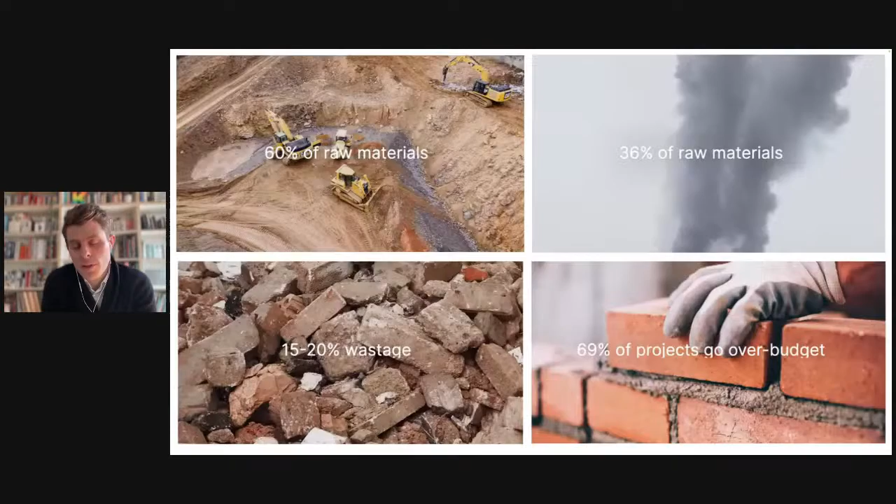It's the single biggest consumer of raw materials. It's the single producer of waste, huge amounts of waste. Projects consistently go over budget, etc., etc. The list could go on, and we're all really familiar with those. And broadly speaking, we know what the future of construction is going to look like, so I'm not going to talk too much about that here.

I think there's a growing sense of consensus around what types of construction, how we should be building in the future. And of course, that's the context in which WikiHouse sits - trying to take those new forms of construction, so zero carbon, manufactured, and put them into the hands of everybody. So doing it in a way that's open and distributed, and can be used by any business, community, anywhere really.

Most of the work that we've done, that you see there in the WikiHouse project, is through the hardware, through the development of the Skylark building system, the blocks - this Lego-like building system, where the goal is really to make it as simple as we possibly can. So we're trying to make building in this way so simple that we effectively take off the table even the idea that it's difficult to build zero carbon homes.

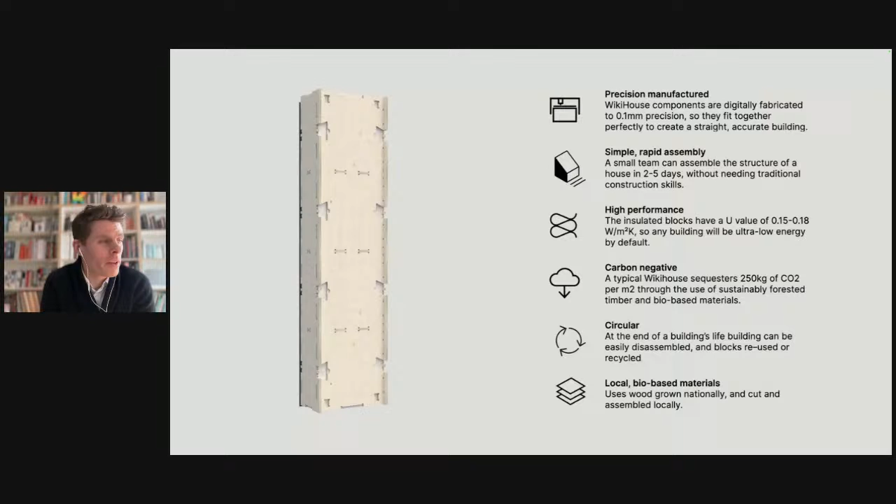That's our goal, and that's obviously the work that you see embedded in the WikiHouse Skylark system by hundreds and hundreds of thousands of people over time, and trying to manifest that. But how are we doing, really, on that thing of making it simple?

If our mission is to make it as simple as possible to make zero carbon homes, it's really clear to see how the Skylark system is a big step forward in terms of making it really quick to assemble homes, and hopefully also to disassemble them. It's not quite as simple, but it's simple.

We make it as simple as possible, so it's possible for small manufacturers and workshops to CNC manufacture the blocks, and the same for storage and delivery. Again, the Skylark blocks are really trying to make that as straightforward as possible.

And what about the other end of the thing? Engineering checking - we've made that quite a bit easier thanks to all the documentation on the WikiHouse website, which we've shared around engineering data, engineering guides, etc. So we've made that hopefully as simple as we can make it for now, for structural engineers to check WikiHouse designs. But what about the design bit?

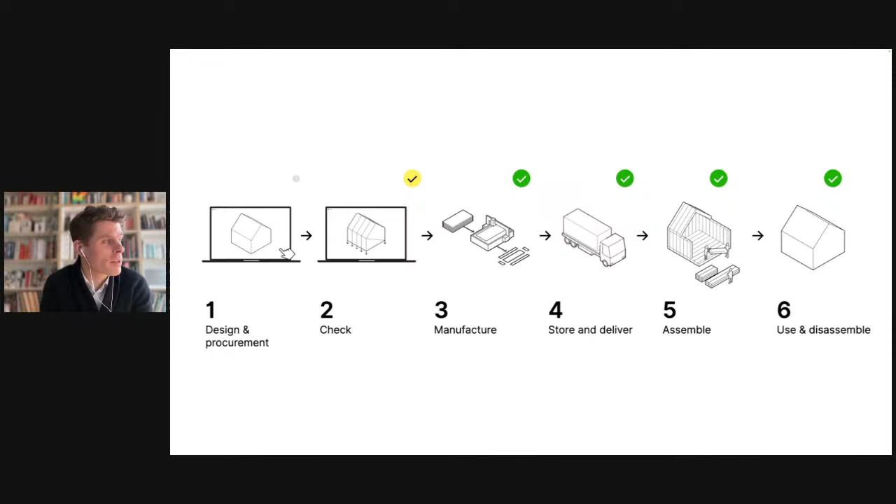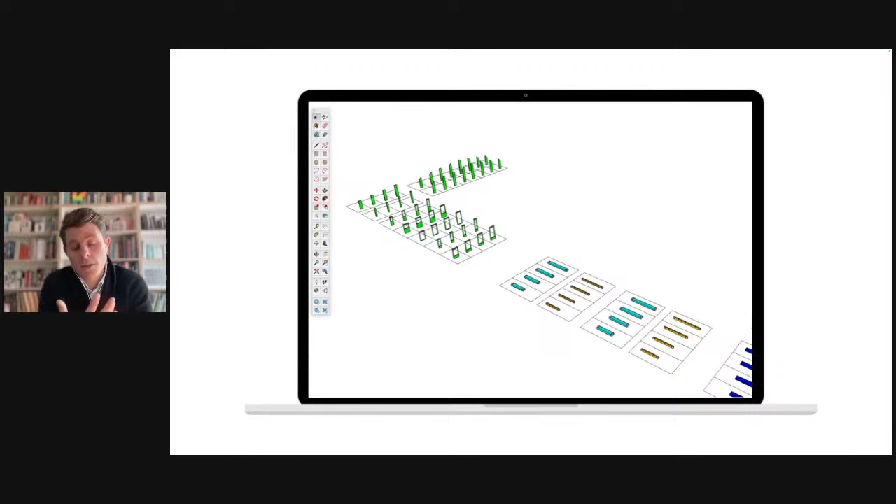In a sense, sharing libraries of blocks saves work, right? In a sense, that's making it simple so that you can use conventional tools like SketchUp or Rhino or whatever you use, or Revit, to take these blocks and then build with them. And in a sense, that does make the design process simpler, right? Because we're taking components that already have thousands of hours of work baked into them and just allowing you to build with them.

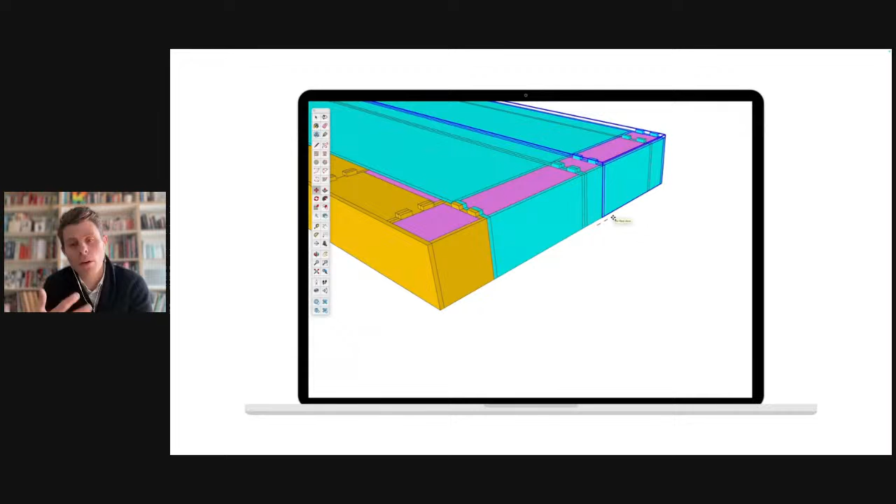But there's still a huge amount of knowledge that's in your head as a designer, and a huge amount that, as you're designing using tools like this, you're guessing at. One of the things that always strikes me is, particularly if you've worked as an architect, you know this really interesting, weird dilemma that comes when a customer comes along and their first question is always, okay, how much will it cost? And then the first question the architect asks back is, okay, how much money do you have? And they're stuck in this loop of expectations.

So actually so much that you need to know in order to make design decisions is sort of, well, it depends. And this is something we've been really aware of as well. So you'll see on the WikiHouse website now, we've created a simple cost estimator, which helps solve that particular question a little bit. But that's, of course, only one of many questions.

Another way to make design simpler is also sharing pre-designed patterns or house types. And that's definitely something we're going to be doing more of next year. But the limitation of this - this has got limitations as well.

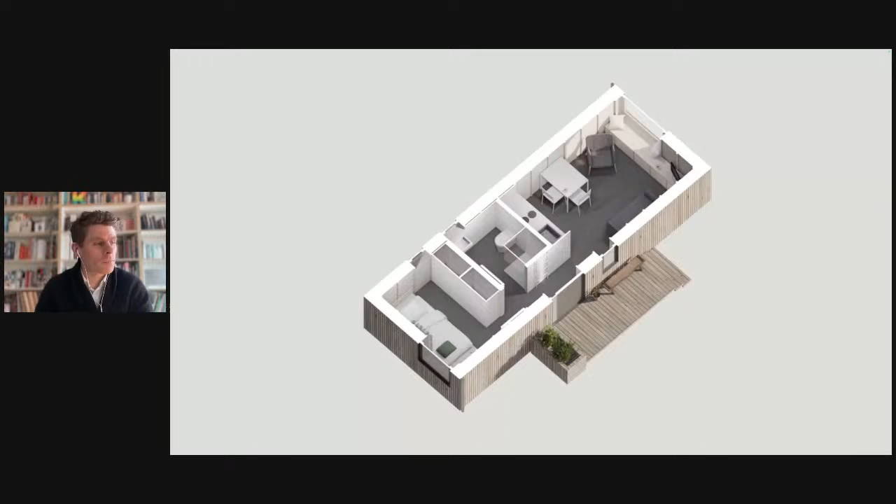One of the limitations is that in general, most projects are not quite one size fits all. So you want to start with a pattern, but actually you might want it slightly larger, or not quite the same design, or changing materials, or moving windows around and things like that. So it kind of still doesn't completely solve the problem.

Very often, once you actually take a pattern and apply it to a project, the building you end up with is not just the original standard pattern. It's a modified, adapted, and customized version of that original pattern. And so you still have this same problem of, well, how much is this going to cost? What's the impact of that design decision? So at the root of this, if we really go right back to square one - what's going on here?

I think we're really talking about a knowledge problem. And in his book, The Checklist Manifesto, Atul Gawande talks really articulately about this. He talks about it like this: basically, the volume and complexity of what we know has exceeded our individual ability to deliver its benefits correctly, safely, or reliably.

He's talking about it in the context of medical knowledge, basically saying there is more knowledge in the world about how to save someone's life in a given situation than any doctor or medical team can meaningfully hope to actually deploy and use on any given rainy Tuesday, because these problems are really, really complicated.

And exactly the same sort of knowledge issue plays out across all of what we could call the knowledge professions. So not just doctors, but also lawyers, engineers, architects and so on - pretty much anything that you'd expect to have people with letters after their name for, it's encountering a really similar dynamic now.

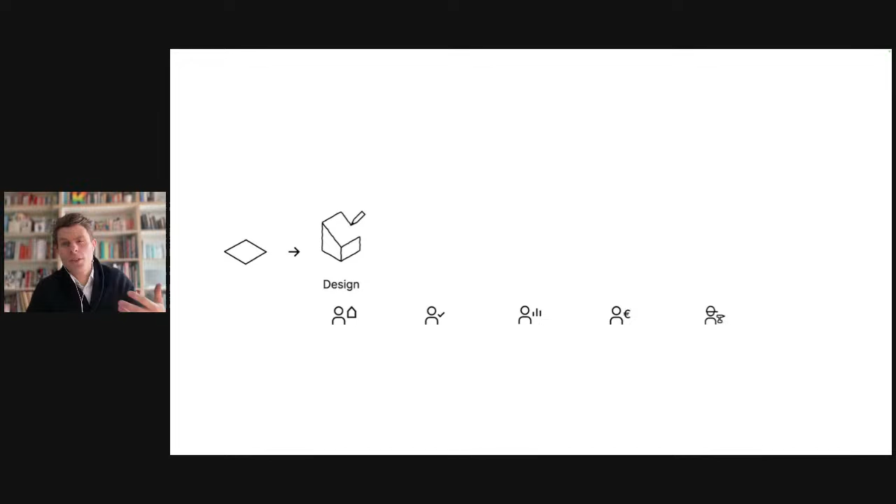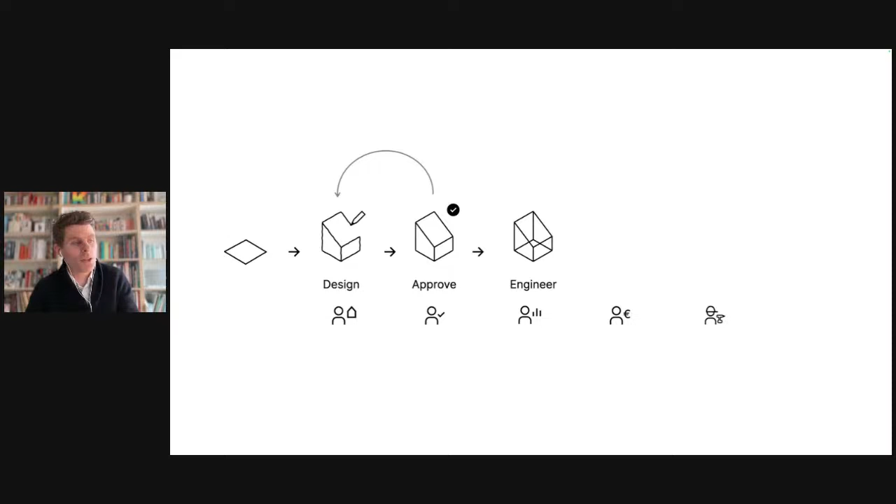Then you have to check: is this going to meet all the relevant regulations, etc.? And if it's not, back to the drawing board. Okay, we sort that out, we've managed to. Then we hand it over to an engineer and say, will this stand up? And the engineer applies their knowledge and says, actually, no. Okay, back to the drawing board.

And then we get that sorted, and then we hand it over to the cost consultant and say, okay, this is going to stand up, but how much is this going to cost me? Oh, we've blown our budget. Back to the drawing board. Let's do some value engineering. And then finally you get to build this thing, and then a whole bunch of things don't quite work, and you actually have to probably go back to the drawing board a few times at this.

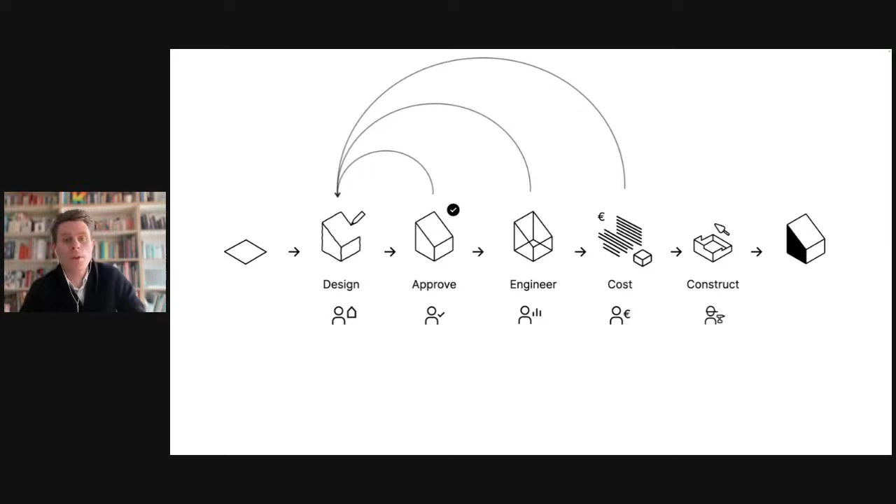One of the most amazing realizations about this is that today, one of the reasons why it's so hard to design buildings is because we're going through this fraught process. And actually, we don't just design buildings once - we actually design every building from scratch several times in order to deliver a building. So no wonder the design process is so expensive and so difficult to navigate.

And no wonder, of course, that so many projects end up producing lots of waste, because you had to cut and measure things on site, going over budget. One of the most compelling statistics around this is from a great report done by Bryden Wood a few years ago, based on UK public sector procurement data: for every pound we spend in the construction process of building a building today, only 51p makes it to the actual building itself.

But there's a really pertinent question here: wait a minute, why hasn't technology already solved this problem? We've got loads of amazing, cool parametric technologies out there, etc. I think my take on this is that even though we've got all these technologies, we haven't fundamentally changed this basic operating system, the basic knowledge system. We've got loads of information technologies, but we haven't changed the basic way that knowledge works through the design process.

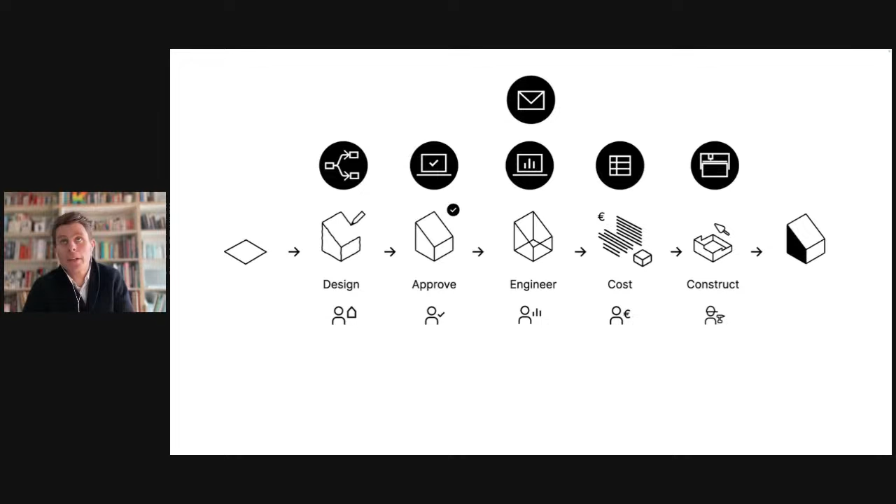And this plays out because no matter what technology we're using, if you actually follow most construction professionals around - follow an architect, for example, for a day - you'll recognize that most of their time is not spent designing buildings. It's spent on the phone, shuffling liability around and basically arguing with people. Most buildings are, in practice, still designed in email inboxes. That's the primary software we still use today to design - the email inbox.

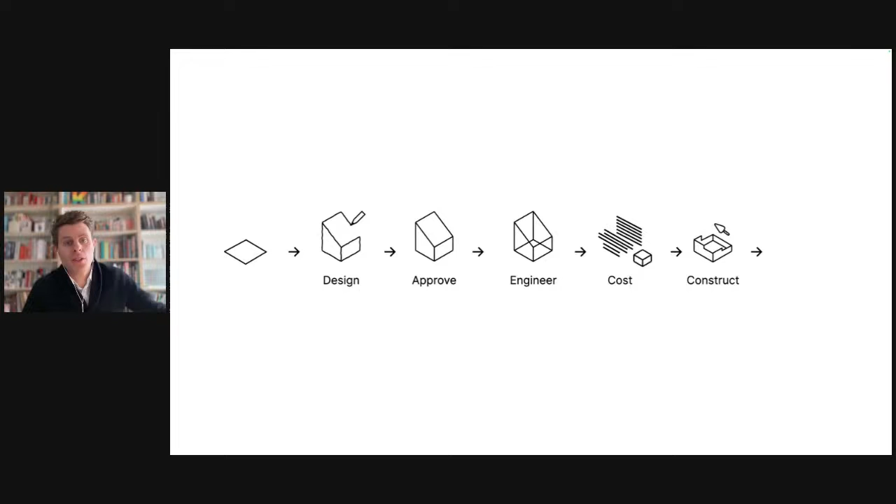But there is another amazing radical technology that could transform this, and it's not new - it's just the web. The web's been around a really long time. But what's interesting in its evolution is that first it was doing text, then increasingly able to deal with more media. In recent years, there's more and more ability for the web to do 3D stuff with things like Three.js, and particularly this continuing move towards VR and stuff like that. So there's a technology opportunity to say maybe the technology that would really change this process is the World Wide Web.

And what it enables you to do is put the process back the right way around. So effectively, when we design, instead of this rather strange process where we do a sketch first and then apply knowledge to it to work out whether it's going to work, in a more sensible, ideal world, what we would do is start with a pre-engineered, pre-costed solution.

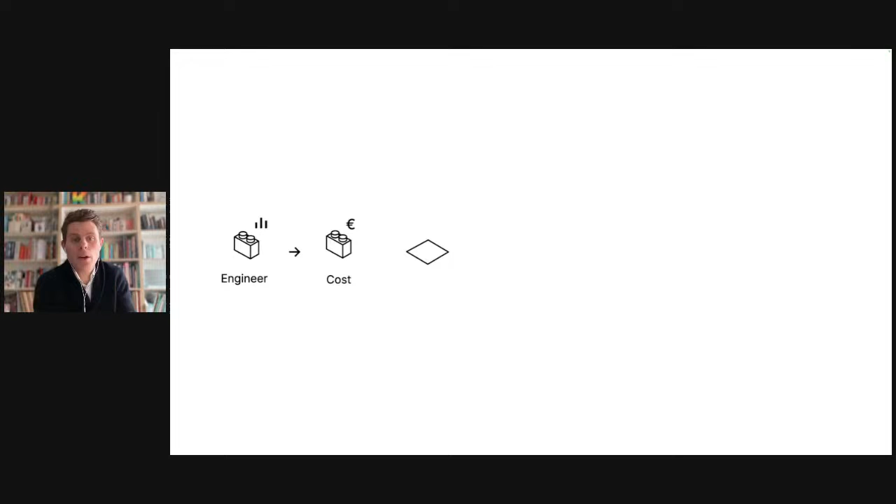I always use the analogy of Lego. So as a designer, instead of just doing a sketch on a napkin, you're essentially given a series of Lego blocks that are pre-engineered and pre-costed, and told: within this system of blocks, go and design whatever you like. This immediately means you're preloading all that knowledge up front, and you can then go ahead and design.

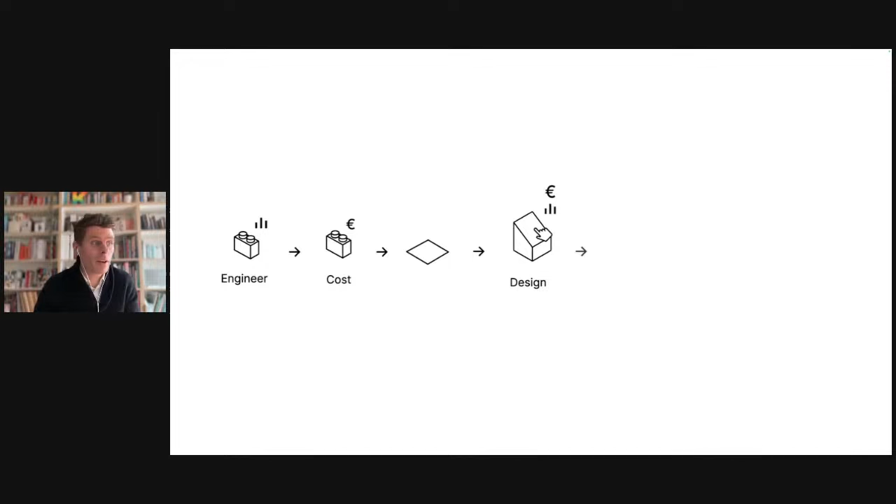And that's what building systems like WikiHouse are really trying to do. It's not just about making it simple to build - it's also about putting the design process back the right way around.

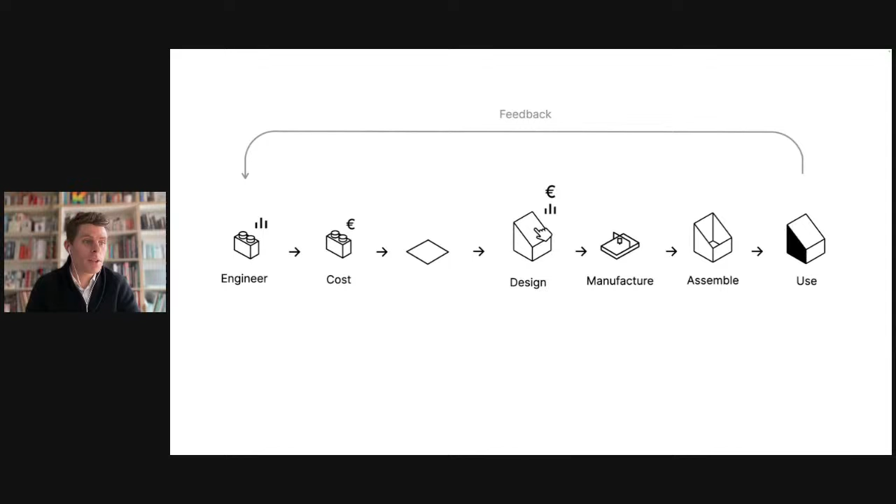And the real win of that is if you can get that process going, you can begin to capture feedback - data from the manufacturing process, the assembly process, the use process - and feed that data back into your original estimates, so that when you're designing and estimating, you're seeing ever more accurate predictions of what the implications of your design decision will be. So what is build.wikihouse.cc? That's basically it.

It's our first shot, actually probably our second or third iteration, but it's our shot at saying let's try and make a web configurator for WikiHouse, to try and make the design process simpler and more transparent. I'm going to hand over to Clayton to actually show it to you.

Before I do that, I should put some key caveats into the mix. One caveat is this is still very much a prototype. Even though we've been iterating on this for a long time, there's loads of interesting precedents we're drawing on to build this, but there's still loads of it which is going to be a bit buggy, a bit untested, a bit weird, and that's one of the reasons why we really want to share this with the WikiHouse community, to engage everyone to help us find those bugs and suggest ideas.

The other caveat is the content at the moment is really limited. The initial plan is we're going to put up a series of single story structures, and then we can begin to add some two-story patterns and other patterns in future. And the third thing you'll notice is at the moment the only currency is pounds, which is fine if you're in the UK, but not so helpful if you're not. So bear with us on all of those things. And with that, Clayton, I'll hand over to you.

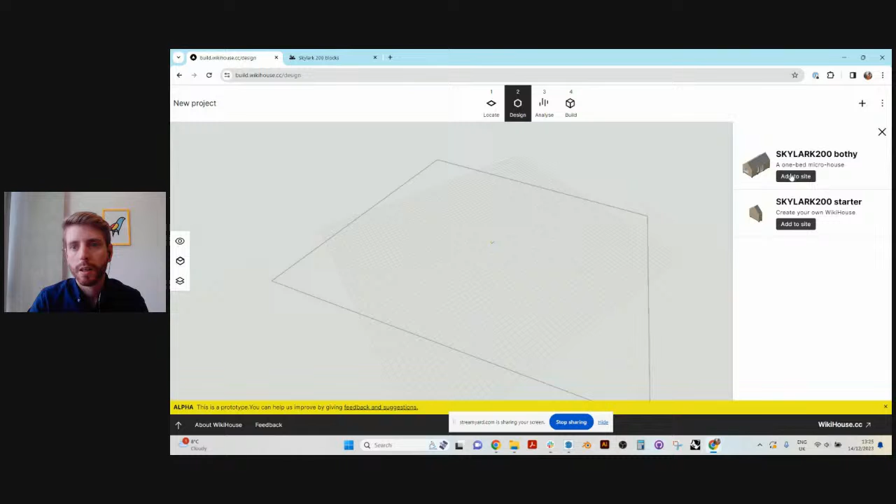So this is the design stage of the process. You can see that it brings in the boundary to scale. And then straight away, the first options you've got popping up here are the ability to add some house types and buildings to your site. Now, as Alastair mentioned, the content is quite limited. We're starting with Skylark 200, which gives you some options in terms of doing single story designs. Firstly, let's just add this pre-configured micro house to the site.

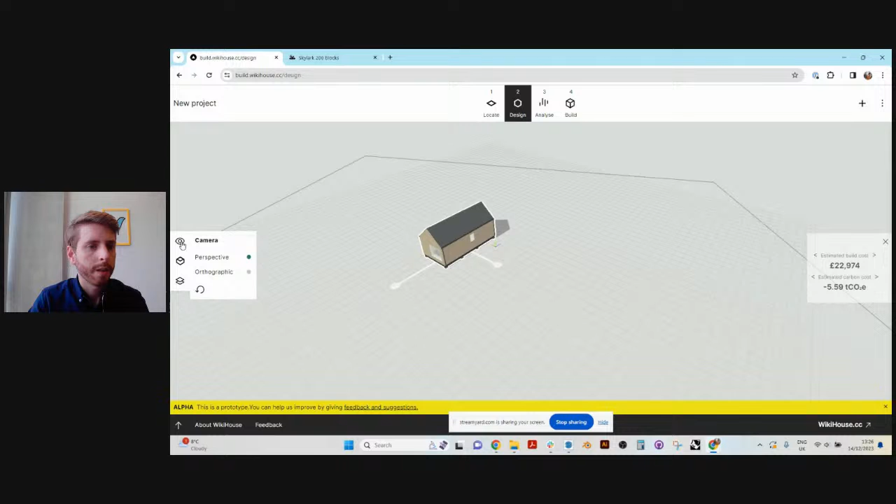So now that's on there, we can do some basic things with it. We can move it around, and we can rotate it. And we can have a look at some controls over here on the left-hand side. We've got some of the camera controls, so we can change between orthographic and perspective views. We can do things like have a section cut through the house, that direction or that direction.

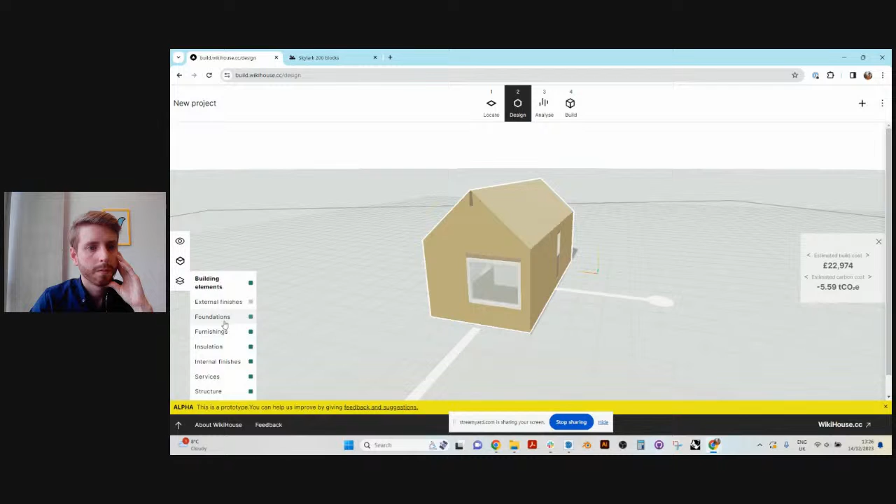And we can then also turn off some of the layers. This is quite useful in terms of showing how the model's been built up. So we can turn off all the external cladding and features. We can turn off things like the foundations. And so basically then you're left with the sort of WikiHouse chassis itself. I'll put everything back on again for the purposes of the demo.

On the right-hand side here, we have the estimated build cost and estimated carbon cost in this little widget. You can switch between them, so you can switch between carbon and internal floor area, switch the chassis cost and the overall build cost, which includes cladding materials, finishes, that kind of thing as well.

I'm just going to position my house over here, and then I can show you what you can do with it. All of the feature commands for editing the house and doing anything with the building itself are through right-click.

If you right-click on the building, you bring up this menu, and you can do things like rename the house. I'm going to call this one Alistair's Tiny House. And at the top here, you can name your project, so let's call this one Wiki Village.

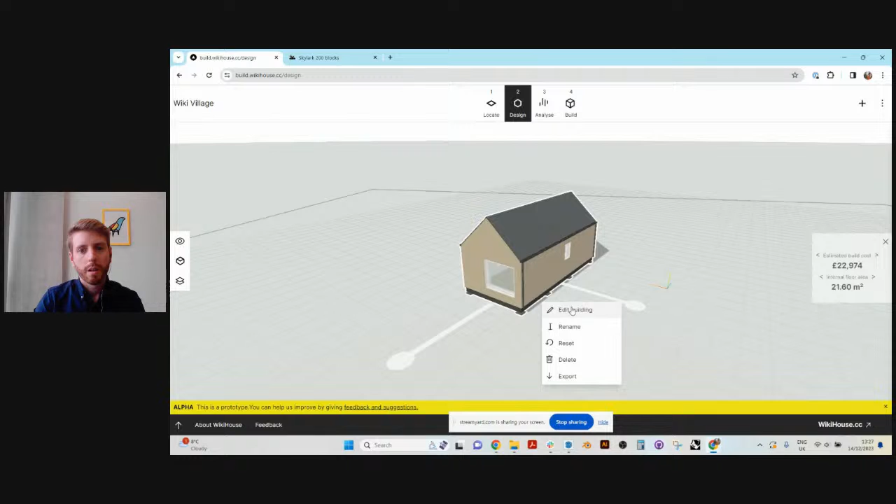We can then jump in and edit the building itself. When you're in edit building mode, you'll see this little button appear, and you'll see that you can't move the house anymore, but you can do other things with it. We should be able to jump in and edit the internal level. I just have to go back out again.

You can do things like stretch the building in either direction, make it bigger, and that gives you the overall control.

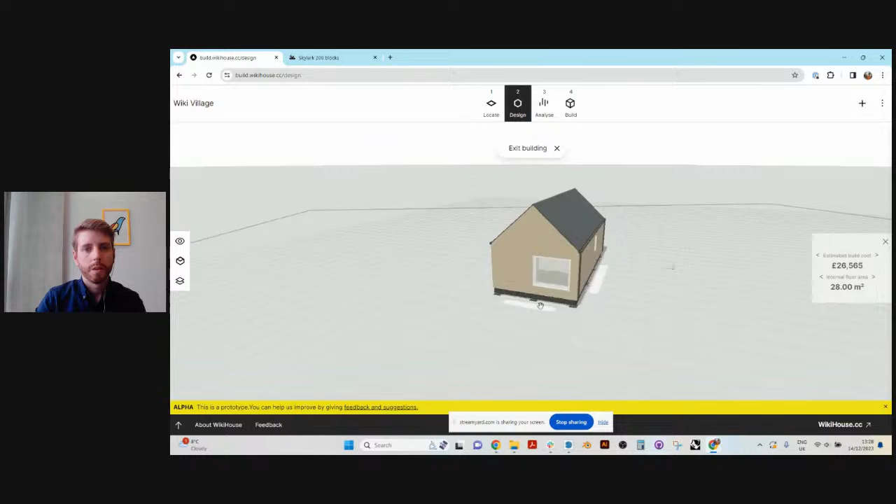You can also start to change the material. You've got a range of different cladding options. If you select the cladding, you can switch between these preloaded materials. Let's say I want to go with the charred timber effect. Changing between different materials will have a slight effect on the overall cost.

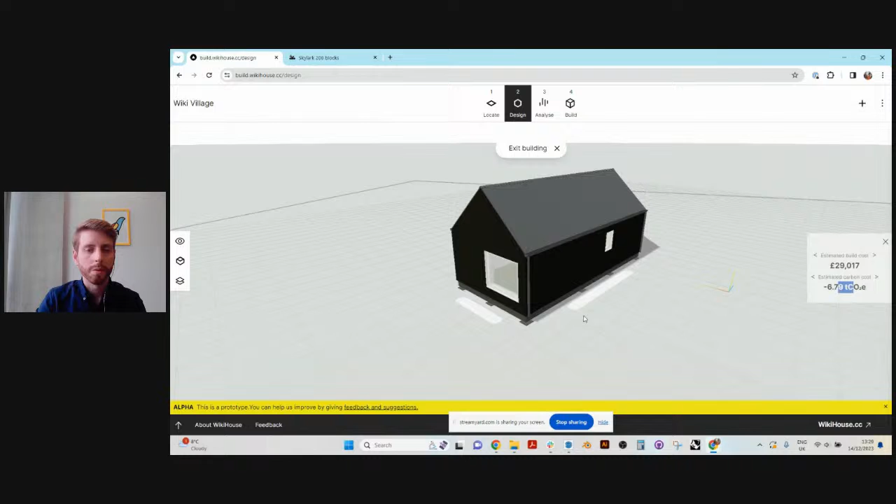What's going to have a more dramatic effect on the cost is if you drag the building slightly and increase the floor area. You'll both increase the chassis size and the cost as well, the embodied carbon. If it lets me go into edit level, which is not doing it right now.

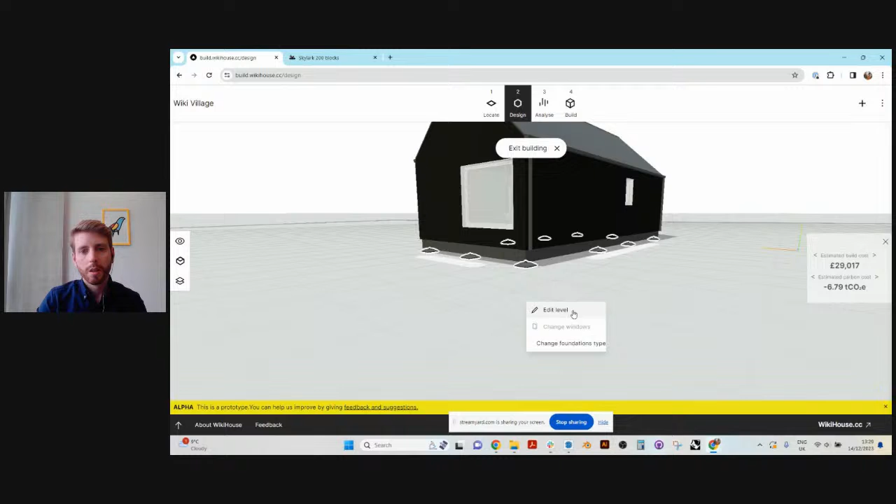You can also change materials for other things. One of the main ones you might want to do is say, this building is currently on jack pad footings. You might want to change the foundations to, say, a concrete slab or some timber screw piles. Let's say you go with the screw piles. You can then also turn the ground plane off.

You can see your foundations and the structure underneath, and you can again make changes that affect the overall cost of the foundations too. If we turn the ground plane back on again, you can see we've got a nice design there. This is a pre-designed house.

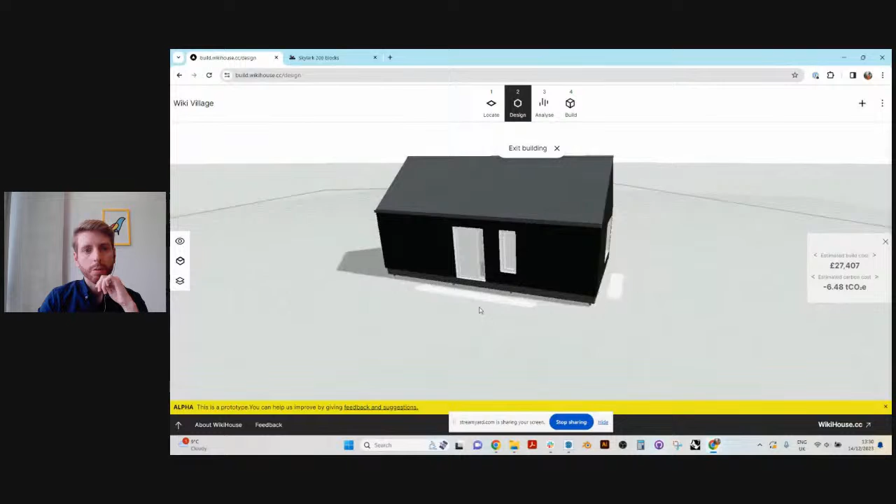It's got an internal layout, which I was hoping to show you, if it lets me. Yeah, from there, let's take a section through, and I can show you briefly here with a bathroom module in there, and a bedroom and a living area.

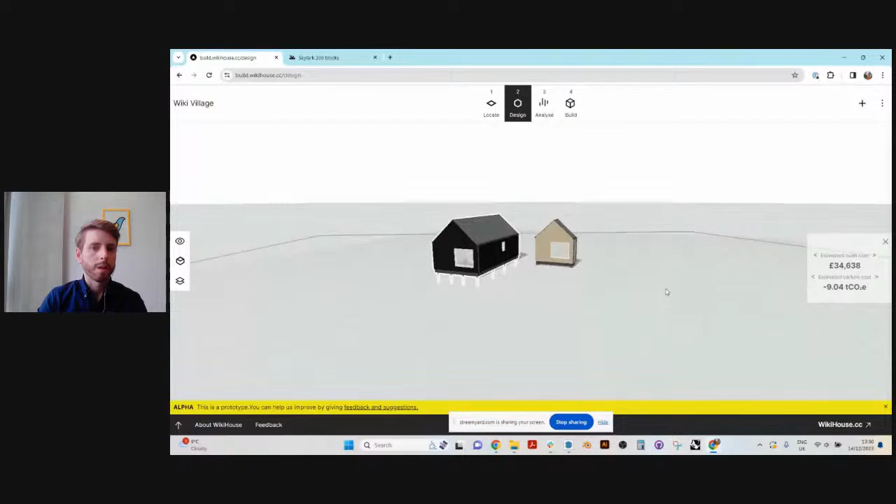So that's one house, but we want to build a village here. Let's go to our menu and create a new house. Let's create our own house. We've got what is essentially a starter model that you can use to completely customize and build up your own design.

This one I'm going to position this way, make it sort of L shape. And this one I'm going to call Clayton's Studio.

If I then edit this building, I get the same controls you saw before. I can make it wider, I can make it smaller, I can make it much longer. It's quite a long building.

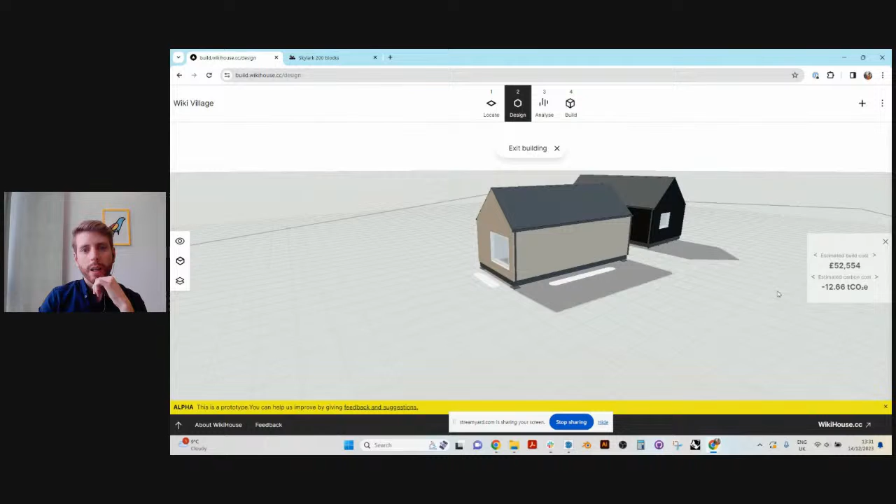And I then want to say, maybe I want a flat roof instead of a pitched roof. You'll see they have an effect on the overall build cost and also on the carbon cost too. All of the carbon cost elements are linked into the WikiHouse blocks, so I'll show you how that works in a minute.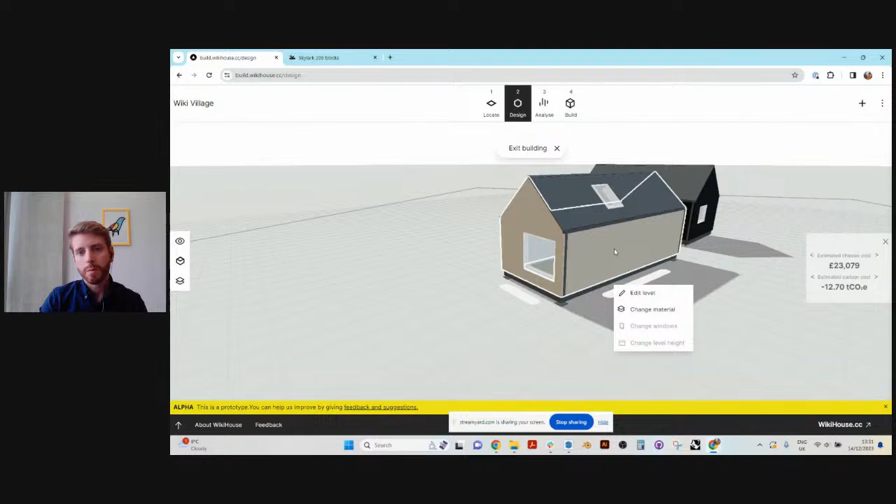I'm going to keep the pitched roof design here, but I actually really want to add a roof light, so I'm going to put a roof light in there. And maybe I want to change the cladding. Let's go with a plaster render.

And I probably need to have a door to get into my house, so if I look at the menu here, Windows.

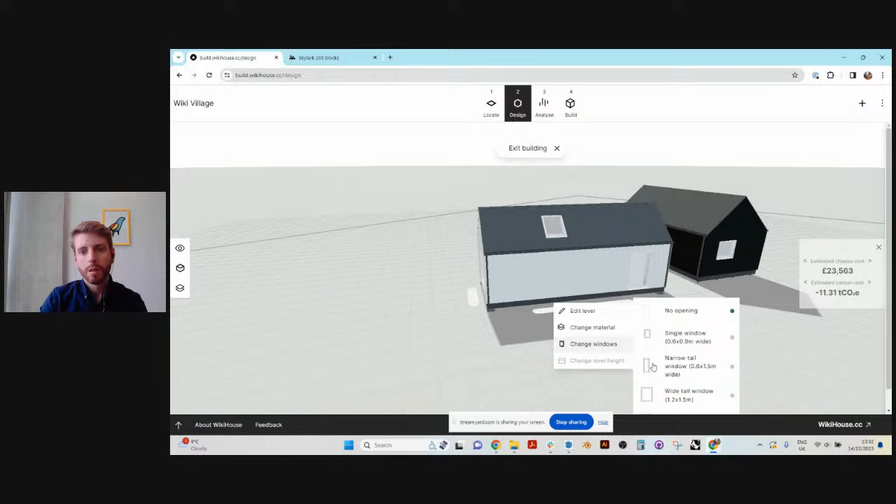Just hide that little bar. There we go, there's my door. Probably need some more windows on this side - a nice wide one, maybe up right here with a roof light. Probably want some windows on this side too, and something that might be a bathroom window on this side.

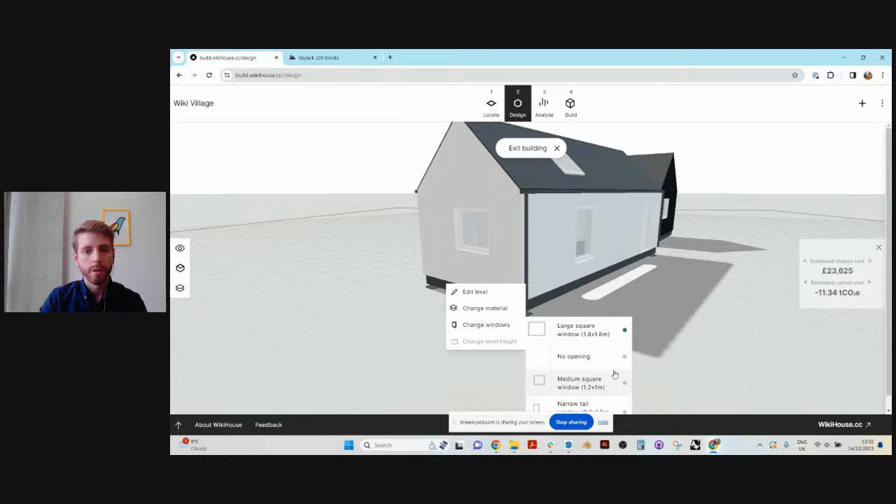Again, on the gable ends as well, you've got options for having no openings, various windows, or WikiHouse standard window sizes. But I'm going to keep that nice big picture window there and just add a small window on this face here.

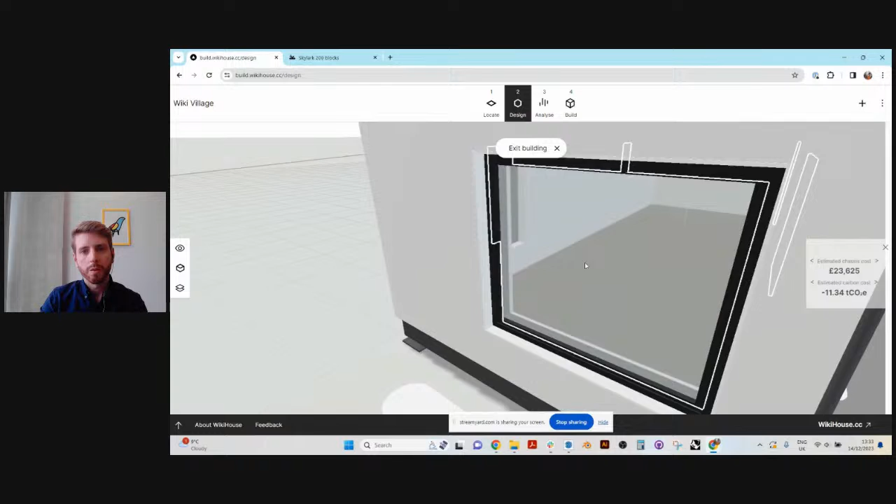You can also change the materials of not just the cladding, but other things as well. So these window frames, I want a sort of dark graphite window, and this window trim around the outside I'm going to make a nice timber finish. So those are my two houses.

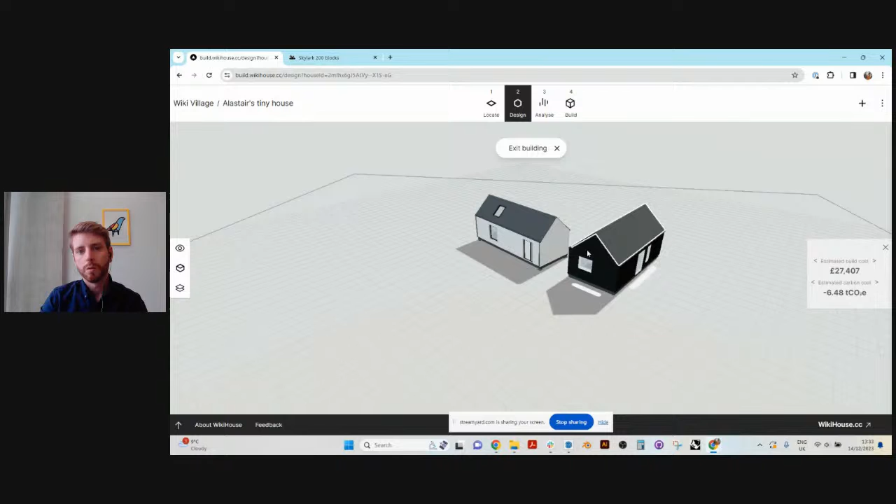I'm going to exit that. Look, there's my little village all ready to go. The chassis cost here, if you look at the build cost, is the overall build cost for both buildings. If I then edit that building, it'll tell me the build cost for that particular house, so you can zoom in and see which building type.

So now I'm going to jump into the next stage, which is the analyze page. This brings in information from... should bring in information. Let's refresh.

There we go. So I've got Alastair's house here in the brighter yellow and Clayton's studio in the faded yellow. You can see comparisons between the overall chassis costs and the total overall floor area for both, and a price per square meter as well. There's some information on how to calculate that, and then the overall embodied carbon.

The embodied carbon we don't break down at the minute - it's quite high level, based on the product EPDs of the materials currently specified in the design. But we will look to break that down more in terms of the difference between biogenic sequestered carbon and fossil emissions in terms of construction. For now, it's just a high level net total.

But you can also turn off one building and just have a look at, say, Alastair's house, or let's have a look at just Clayton's studio, or put both in one. You can also jump back to the design page and view the design - the internet's being a bit slow, but it should reload.

And if you then go on to the next stage, say you've finished your design and you're pretty happy with it, you can have a quick overview of it here. Okay, that's great - I've got these two buildings that I want to build, total floor areas in square meters. It gives you an overall cost for both the chassis and the rest of the building altogether, and an overall embodied carbon. From there, you can actually download the 3D models.

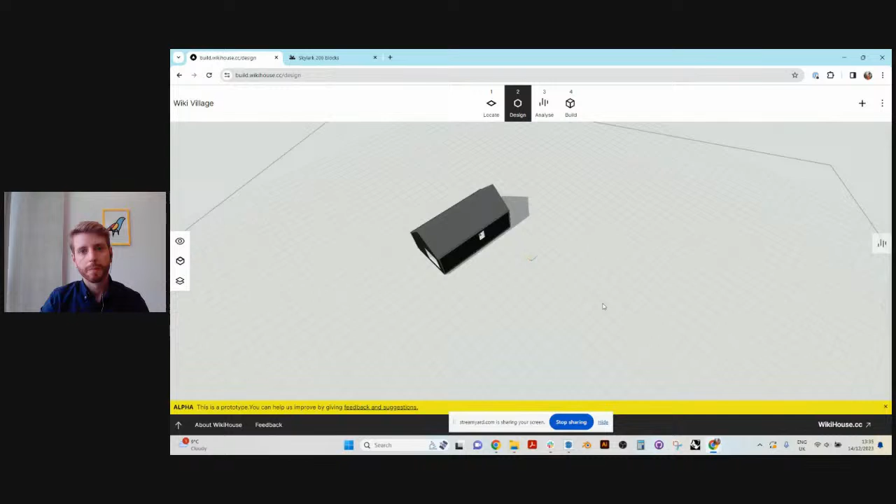At the moment, these come - you can also download them here from the build page. You can export them as OBJs or GLB models. We know that's not going to be the entire list of file formats people want, so we'll be expanding that as we go. For now, you should be able to import OBJ into most CAD software, things like Blender and SketchUp, and GLB is readable from a lot of web 3D models.

We've also got, on the left-hand side here in this navigation bar, an order list. This will compile the total set of all the blocks within the design. So looking at Alastair's tiny house, we can see there's going to be 4 corner blocks, 1 door block, and a set of windows and walls, and it totals all those up to give you a combined total for the entire structure. This includes both the chassis and the insulation.

Everything that comes on our website here under the WikiHouse blocks is connected through to this table. So you can say, okay, I'm going to download the cutting file as a manufacturer - that might be really useful. You download this entire table as a CSV.

You can then also look at some of the other spec information in here. So you can see, through this, I've made some choices here. I've chosen these default materials. I changed the cladding, so I want to see what the cladding is, so I can see the cost per square meter, or at least a rough estimate, what the embodied carbon cost is, and then we can add all this up. You can just sort of total cost for the project.

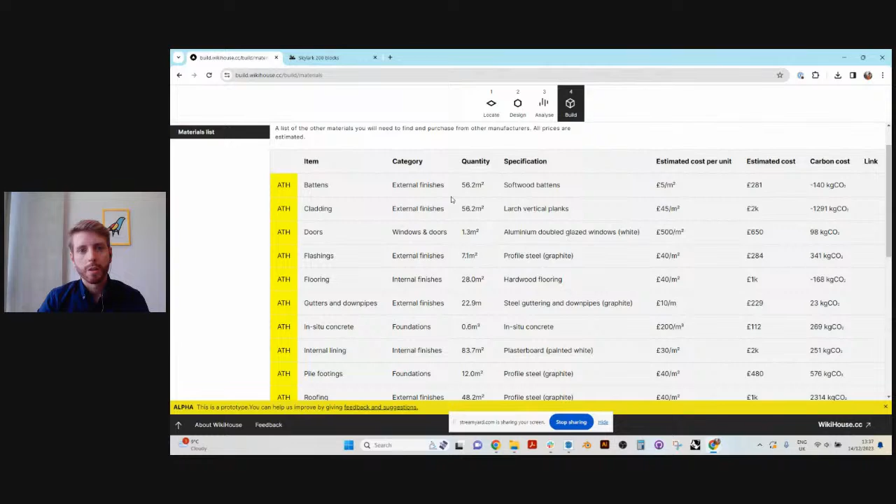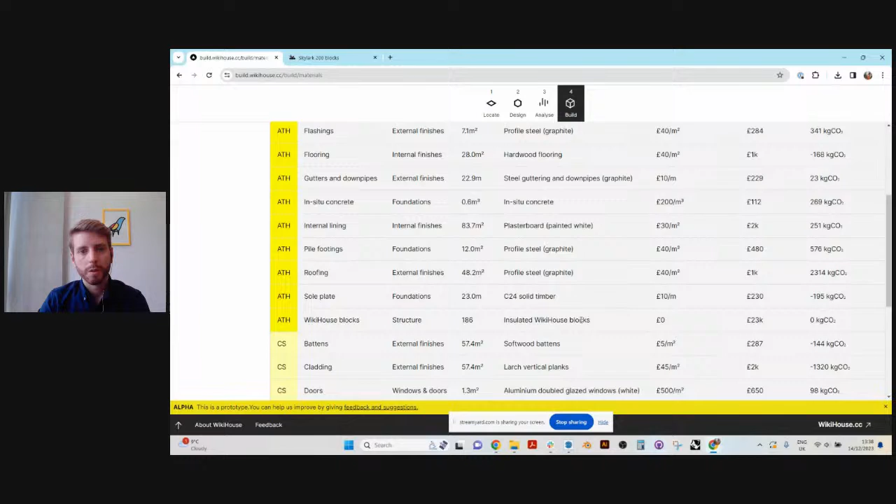Like with the analyze page, you can turn one building off and just look at the cost for a single building, or you can add them together. Up to you, really. Again, you can download this list as a CSV spreadsheet, which means you can take it further into your own software, or to a builder or a manufacturer, and start to work out these quantities. You start to place orders for the types of materials you want. Eventually, we'll be able to make changes in the specification itself, so you can override these with your own spec options and choices, and your own costs, and it will all calculate on the basis of that.

So then from the overview, not too much more to say, really, is that you can then download the whole project file set as a zip, including all the materials, 3D models, which might be really useful as a starting point for a design project.

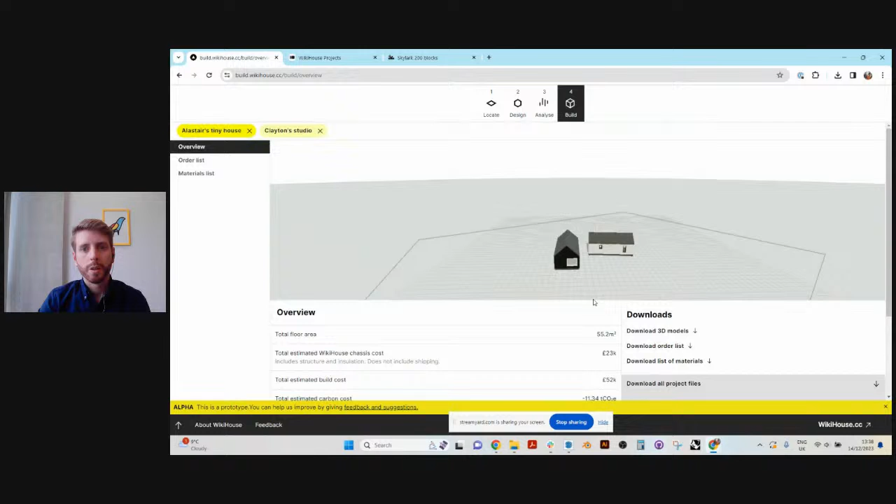Or you can get in touch with us. So if you're happy with where your design is, you click straight through here and it'll take you to our standard WikiHouse contact form, where you can fill out a little bit about yourself and what you're trying to do. You can then attach these files to that form and let us know exactly what you want to do. So we can connect you with the right people, architects, engineers, manufacturers, and installers, and help you realize a project.

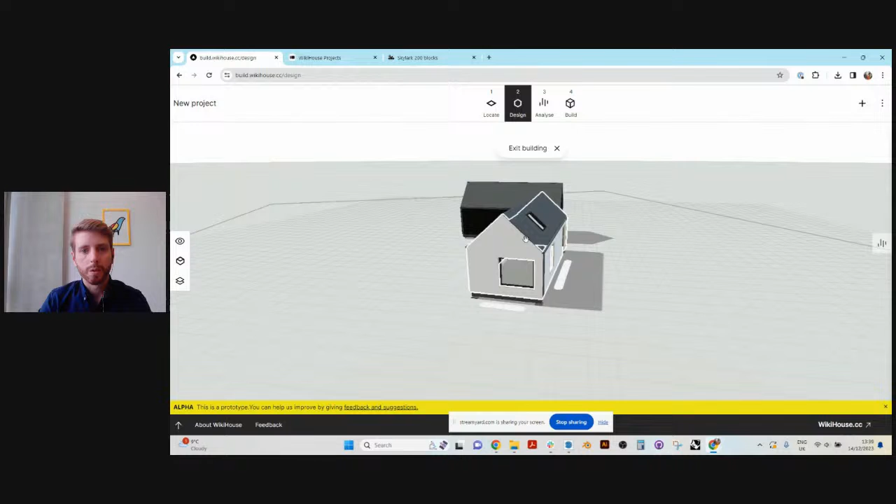But the main purpose of this is just to be a place to dream a bit, play around with different ideas, play around with different types, see what the standard blocks allow you to do, and then also see if there's limitations to that and you want to do something more bespoke or specialized. But hopefully that gives you a good feel for everything.

You can also then delete a building if you're not so happy with that one.

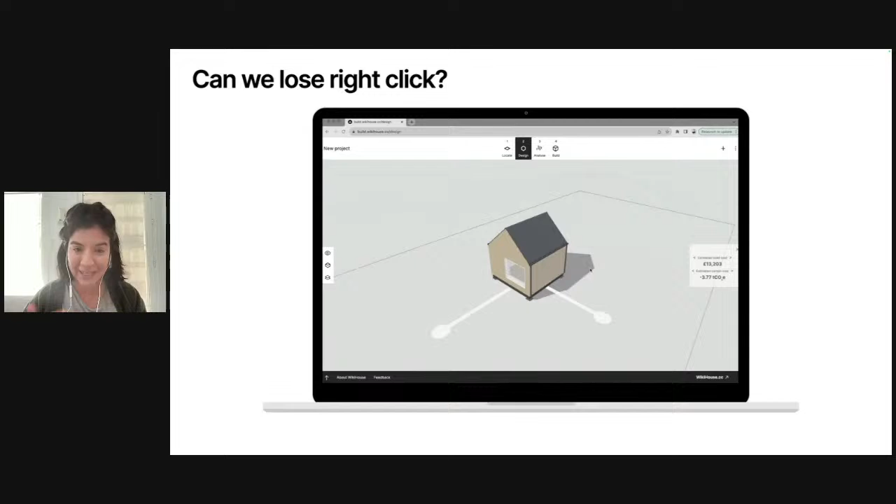The next bit of feedback we received is, can we have more metrics as we design? At the moment, you can see on the right-hand side, you have got some amounts in pounds and you've got the carbon. So at the moment, if you have the carbon, you can't actually see the floor area. It would be helpful to have those things show at the same time.

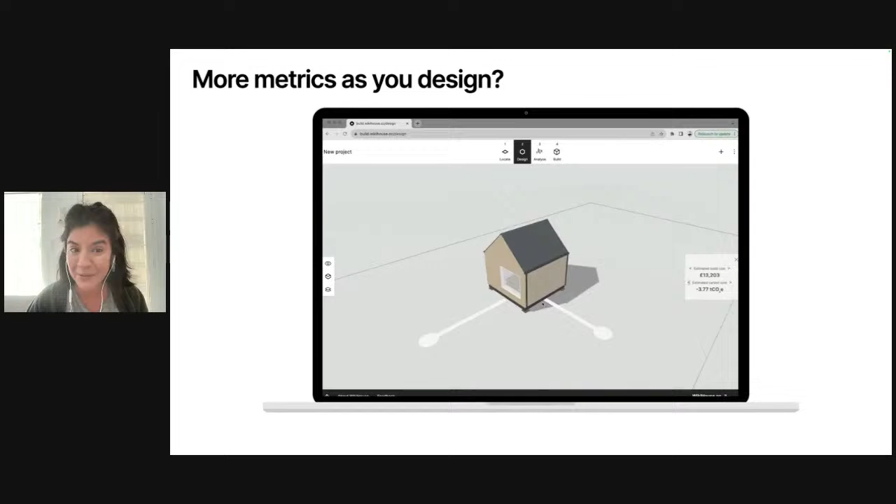Another thing we don't have is the site area, which is something important to people. So we've got a note of that.

Once you get to the analysis page, one thing people have told us is that even though it's helpful to have these three metrics, some of it needs more context. So we will be adding that. For example, WikiHouse says it's 10% more than a traditional build. But what do we mean by traditional build? Is that brick and block? Is that timber frame? We need to expand a little bit on that.

Then we get to build, which is the final stage of the process. We are sharing a lot of information at this stage. Some will be very handy for manufacturers. Some might be a bit confusing if you're only just starting your journey with WikiHouse. So we want to clarify what kind of information people need at this stage, so they can then go on to actually realizing the project. We'd love some feedback on this section in particular, in terms of what you want to do with the information we give you, and where you might go next.

At the minute, you have a button that will take you to a Typeform to contact us. Is that the right balance of information? Is that the right path for you? Is there information missing? Do you want more information at this stage?

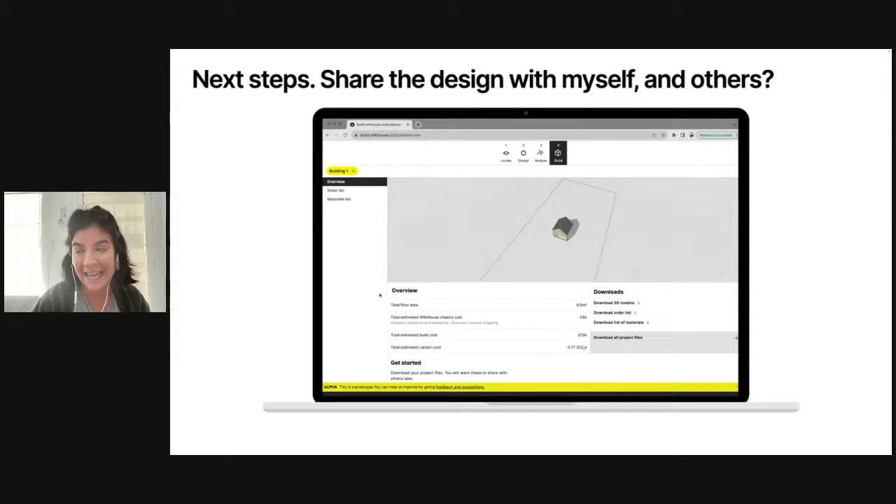These are the things we've found so far through our user testing. The big ask for you today is please test it, play with it, break it, and then tell us what you think. Tell us as much detail as you want about what's working and what isn't working for you. To do this, we have a Typeform that I'll show on screen just now.

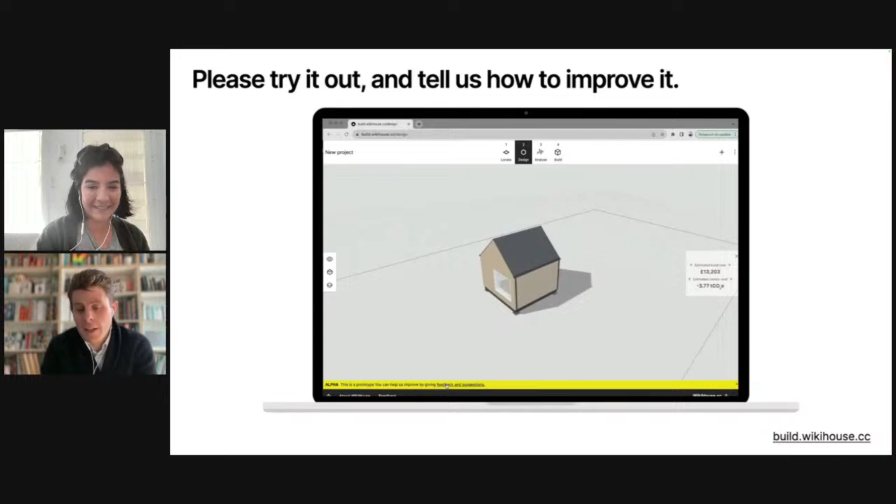Alistair, you need to unmute yourself. Dance between the screens, thank you very much indeed. What I'll do is actually just leave that in that view.

Cool, yeah, well I guess Mal, we're keen to hear if there's - what questions people have really.

I guess another thing we should probably do is tell people where they can go and try this out. So some of you might have already gone onto build.wikihouse.cc, and you'll have noticed there's not a particularly secure password on it. But if you enter the word skylark - I know, we're quite original - then you'll be able to get access and start playing with it.

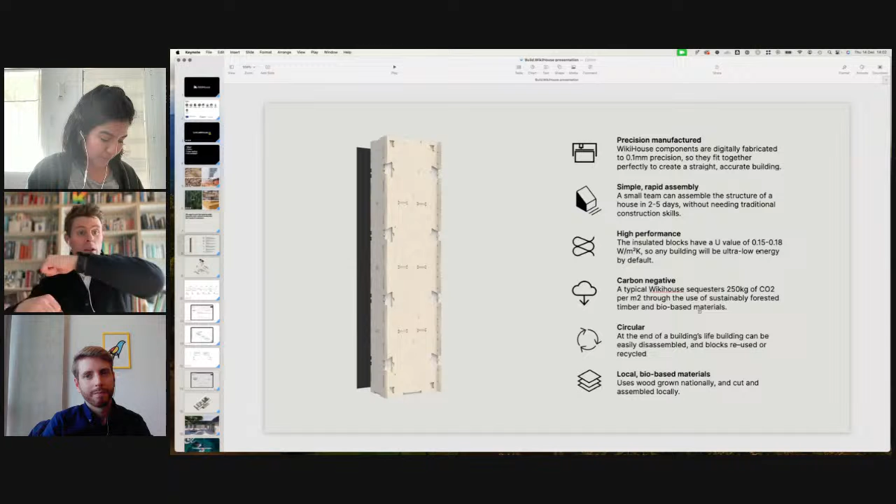At the moment, when you go on the WikiHouse library and look at all the blocks or get a design kit, you'll get a load of beams designed to sit across a single span building. But it's quite possible in your projects you might want multiple spans—so you have a room, then a wall, then another room, and that might be how you make that L shape.

It's not that you couldn't do that yourself now by just taking the WikiHouse blocks and hacking them. But at some point in the future, we will also add some blocks to the library that help with that, and maybe that will line up with us building some of that functionality into build.wikihouse. But let's see how it goes.

This whole thing is a really, really big experiment. If this isn't useful, we might shelve the whole thing, which will hurt us, because we love it and we've poured so much love into this project over so long. But we want to make sure what we're building is useful, and we're prioritizing accordingly.